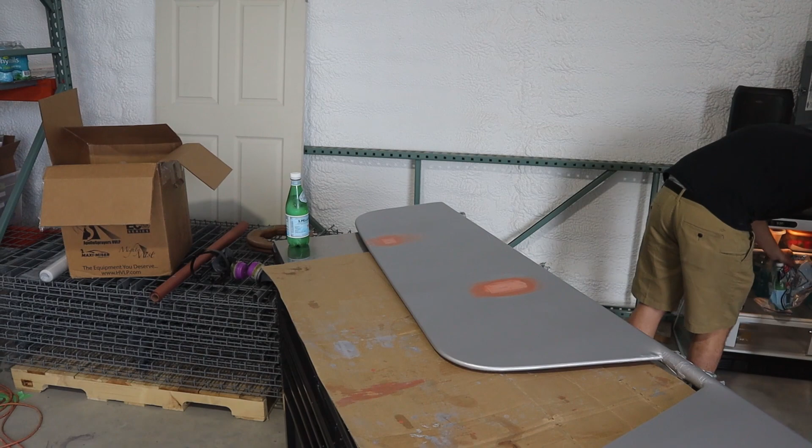So, the tail surfaces are probably the hardest things to cover, hands down. In the manual, it says to start with the wing first, which is the most intimidating thing to do. And I would agree, it is intimidating, but it is the easiest thing to cover, hands down. I'm on the fuselage right now, so I can confidently say that the wings are the easiest to cover. These are definitely the hardest.

One of the reasons why they're so hard is because they have all these curves on the back. It's not difficult, it's just a lot of work to get the fabric to work around a curve. It'll work if you're good with an iron, but there's definitely some technique involved, which I'm going to show eventually when I get to the fuselage. But it took me a while to understand it.

This piece I actually covered with two pieces. There's two ways you can do this. You can wrap one single piece of fabric all the way back, so you have the end of the fabric wrapping here, and then another fabric going on top of it. So it would be a single piece sort of clamshelling the whole end. That I tried to do on the rudder, and it ended up being a real pain.

So what I decided to do instead was the other method, which is wrapping it in two pieces. This is how you wrap the wing, so it made sense to me to just do the tail surfaces this way. Let's stop looking at these patches, they're ugly. So this one is in two pieces, just like the other horizontal stabilizer. But what you end up doing is do the bottom first.

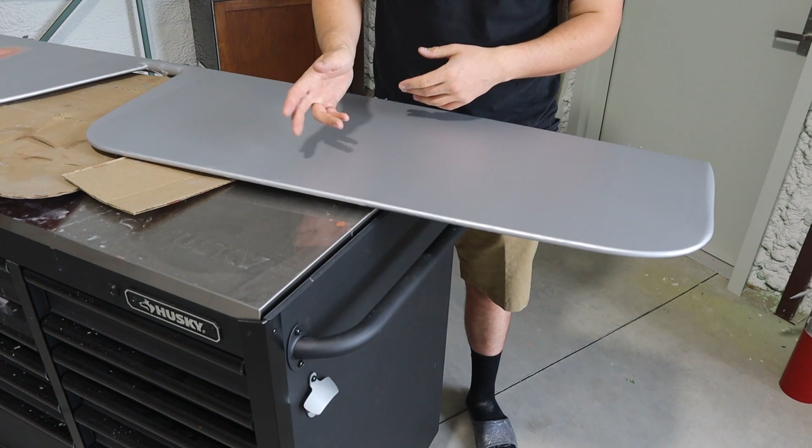But definitely a challenging process. I wish I could explain a good way of doing it to you, but it's really just something you have to experiment with. I'm going to show you how I do it with the vertical stabilizer, and that'll help give a good idea of how to cover it. But definitely the hardest part, definite learning curve.

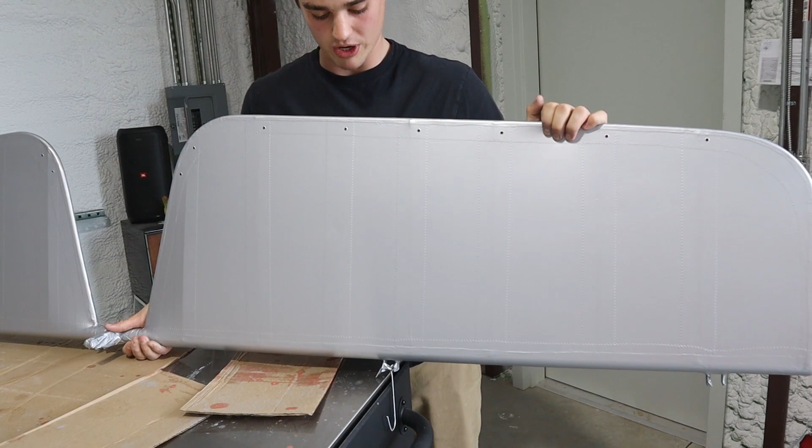Some other thoughts about this. Does this one have inspection on the bottom? No, it doesn't. I got drain holes, which were on that wing over there. There's a couple ways of doing these. There's special grommets, not included in the kit, and I'm not buying them because I don't need them. Every wooden rib basically delineates a bay, and every bay needs a drain hole. I just used a little washer and my burn tool. You put the washer on and melt the middle out, and it makes you a drain hole.

And Polyfiber says that you don't need a grommet on there as long as there are 2 layers of fabric. In fact, this is 3 layers of fabric. There are 2 finish tapes and then the bare fabric. That does not need reinforcement or anything. It's just fine just how it is. Seems kind of strange and a little bit odd, but it's the bottom of the wing. Who's going to see it? Doesn't even matter. So those are the drain holes.

Finish tapes, they go on every wooden strip. You could use the 1-inch tapes, but I didn't have them at the time, and I didn't think it was necessary, so I just put 2-inch tapes on everything. It really doesn't make a big difference.

One other dilemma that I ran into, again, I don't really know what I'm doing here, so I figure out these things along the way. When I was sanding the Poly-Spray, the silver coat, I ended up sanding a hole all the way through the fabric. And that's because there was a tiny little, is that another one? No. There was a tiny little bump on the rib underneath. So I was like, what is this?

I thought it was a pinhole, so I just kept trying to sand it out. And I realized I've sanded a hole all the way through the fabric. And I went through this moral dilemma of trying to say, oh, it's fine, I'll just leave a hole in there. But I couldn't really live with myself unless I put a patch on. So I just put this finish tape patch on it.

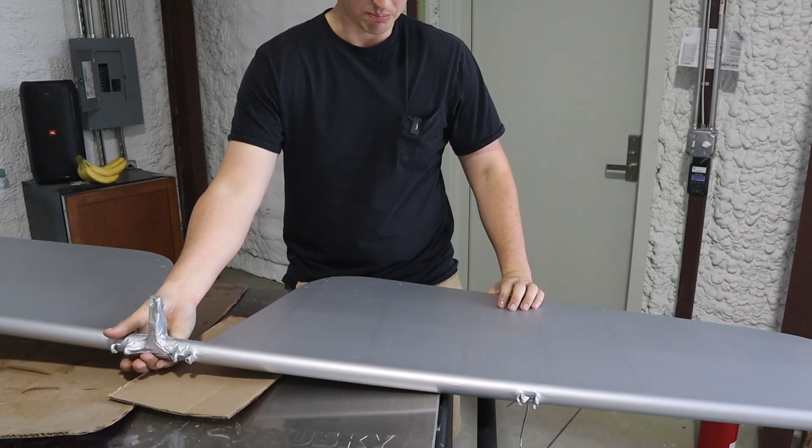I spent a lot of time trying to get all these tiny little imperfections out with the iron. But at the end of the day, a lot of them won't even show through. But let's just look at some of the ones that do show through, so it maybe helps inform what you have to work out with the iron. So this is the bottom. Obviously the bottom is not going to be perfect because it's the bottom of the elevator. Who the heck's going to see it? Nobody. So I don't really care. It's going to get beaten up by rocks and stuff anyway.

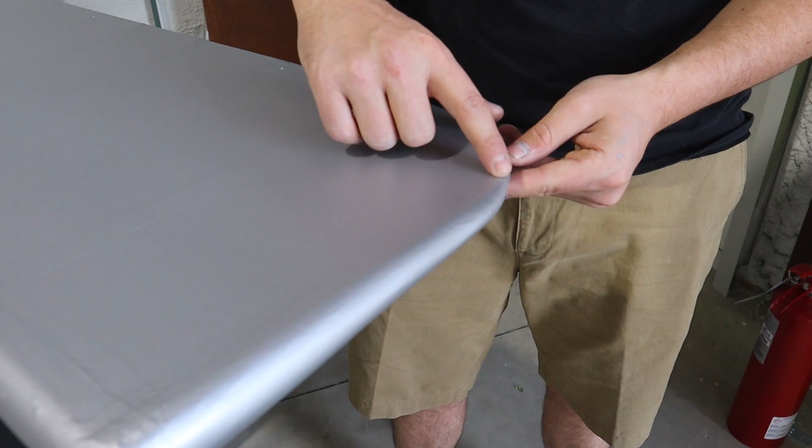But it's a good example of what shows through the fabric, because I didn't put as much effort into getting the imperfections out of the covering process. So over on the end here, I don't know if you can see this, but this was where the fabric was pulled over and had to be ironed down. And that was a little wrinkle at the corner of the seam. There's one right there, there's one right there, there's one right there.

Those are just tiny little wrinkles that show through on the paint, and they show up as a tiny little bump. Mind you, even on this poly spray, I can still go through and get those out with an iron, but at a certain point it's diminishing returns.

If somebody's really that vain that they're going to comment about my wrinkles on the bottom of my elevator, then we're not going to be friends. So it's not really a big deal.

So there's an example of something. This right here was where poly brush was tacked on a little bit too thick, and then I hit it with an iron. You can actually see the shape of my hobby iron right there. So that actually is showing through the paint. There's another example of it there. These little imperfections here were poly brush runs.

There's poly tack runs somewhere on here. Like that was excess poly tack. This whole seam back here was a little bit of excess poly tack. I could have cleaned it off with MEK or ironed it out, but all of it eventually shows through, and it just makes more finish work for you later on.

So if you're trying to chase things out with the iron, a good rule of thumb is if you can feel it with your finger, it probably will show through. It is way easier to get it with the iron than it is to sand it later on. And at the end of the day, if it's on the bottom of the elevator, I don't care. So I'm not going to chase these out.

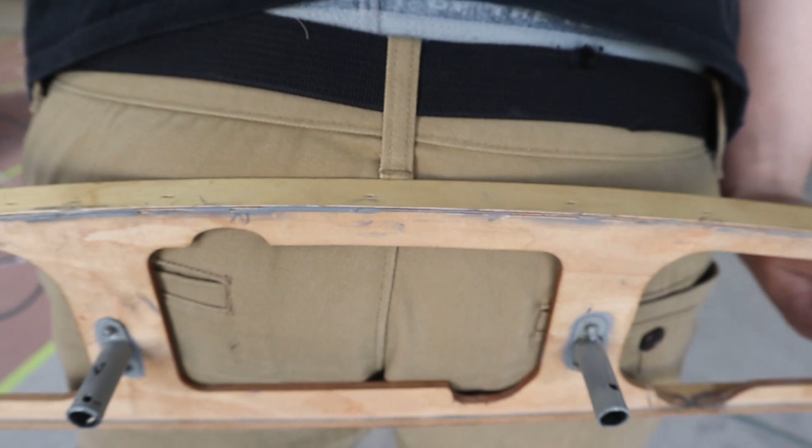Okay, we're going to talk about the butt rib dilemma. So, as you may know, this is a butt rib. It's not called a butt rib because it has anything to do with butts, but it does butt up against the wing, so that's why they call it the butt rib. I just think it's the silliest piece on the plane, and we always joke about it.

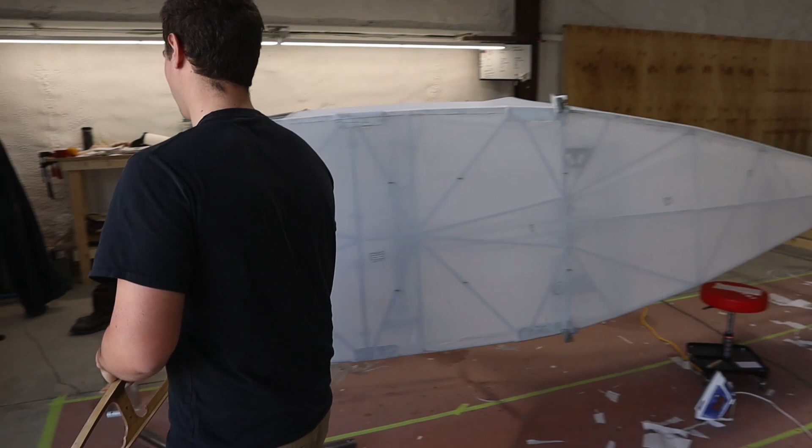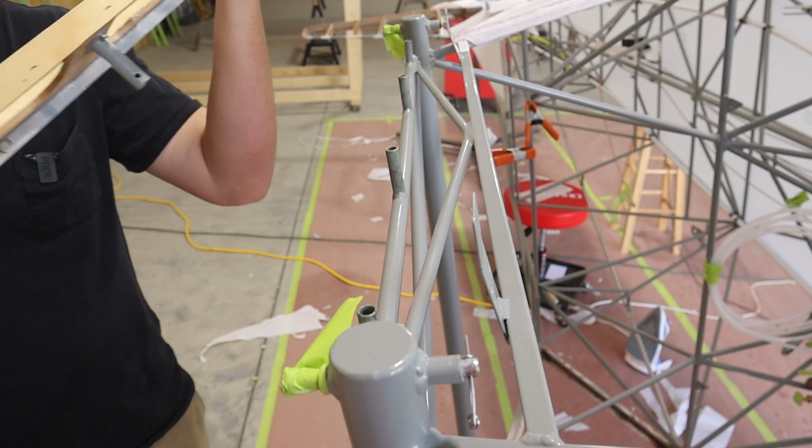Nonetheless, I did this wrong. We're going to go over to the fuselage so we can see what this looks like. This is how the butt rib attaches to the fuselage. So there's basically 4 of these little metal pieces that slide onto this slot and lock this thing in place. And this one's a real pain. I'm not even going to put it back. Yeah, oh wow, that worked well.

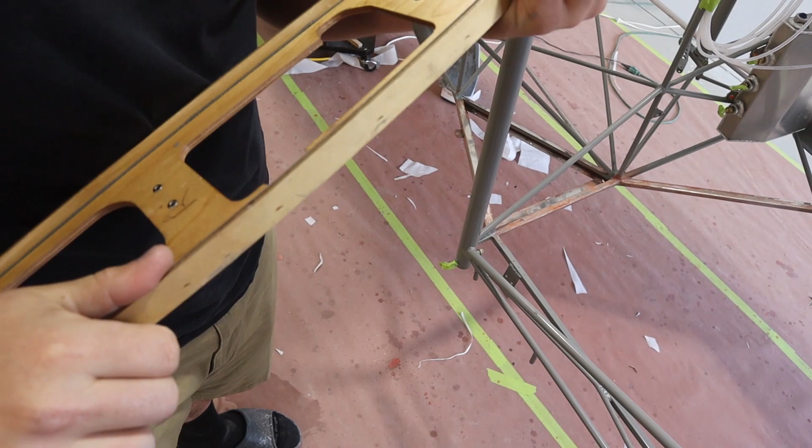What it does tell you that you have to do is take this little aluminum strip, which is a tiny little piece of floppy aluminum, and glue it up against the bottom of the cap strip here. I was just stupid, and I should have just inferred that the way I did it was wrong. There's a long side and a short side. You see, one side here is longer than the other. This one barely even protrudes, and this one sticks out pretty far.

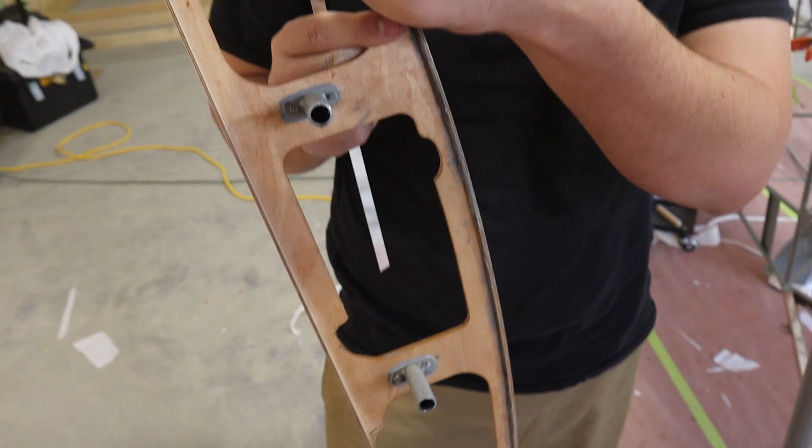This piece is cut just long enough so that it almost perfectly lines up with this long side. And I should have just seen, oh, wow, that matches perfectly. That's maybe where it should go. Nope, wrong. I just put it on the wrong side and glued it in place. So what I've done basically is ripped that other piece of aluminum out, and now I have a bunch of Hysol in here that I'm going to have to sand out with a sander, and I'm going to have to glue it to the other side.

What this does is add a reinforcement for attaching the windshield. So let's just look at the one that's on the fuselage. If this was done properly, this piece, I'll put this other butt rib down, this piece would be glued in there, and when the windshield sits on top here, they actually call it a moon roof. The top of the windshield, or the moon roof part, sits up atop this butt rib, and it actually mounts through this cap strip here. And this aluminum piece is a reinforcement plate for the back of the cap strip.

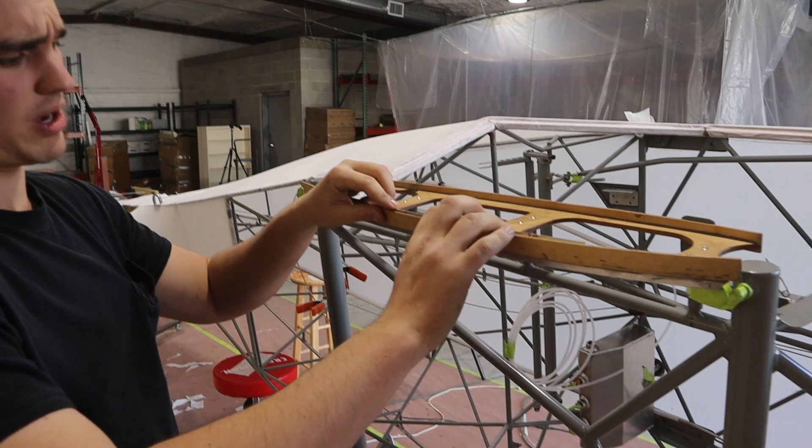You see what I did wrong is I put it on the short end, and there's no way I'm going to mount the windshield to this tiny little strip. And now I'm going to have to undo both of these. I'm not going to redo my butt ribs entirely because there's no need to. There's a lot of work, a lot of sanding and stuff. But I am going to rip this piece out and put the same piece on the other side, and we'll call it a day. I'll have to end up cleaning all that Hysol out. It'll actually be a lot of work, but a lot less work than trying to redo the whole thing.

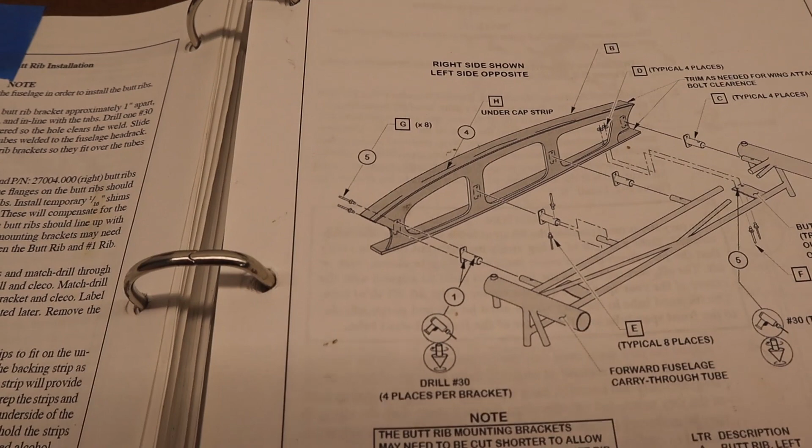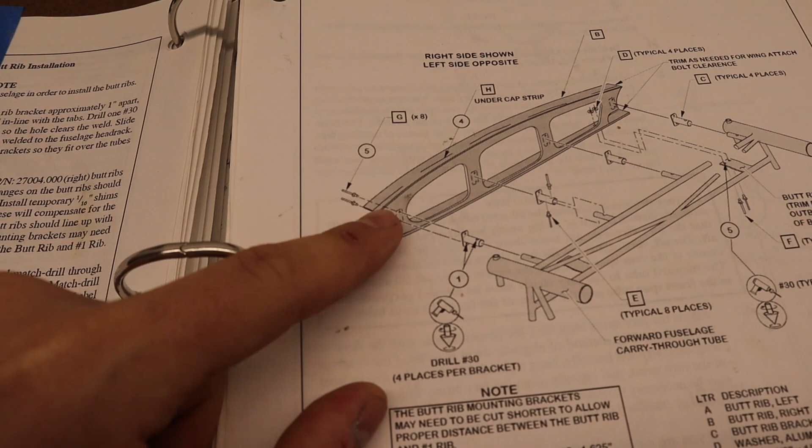So one of the things that Project Kitfox talks about is how, again, the manual doesn't really say which side to go in and out. I actually can't remember if it does, but I remember this being a problem piece. It was very hard to understand. But you see that the long side and the short side basically have a direction where they're supposed to go. We inferred, when I was doing this a while ago, that the long side was supposed to go on the outside, which is actually technically the correct way to do it.

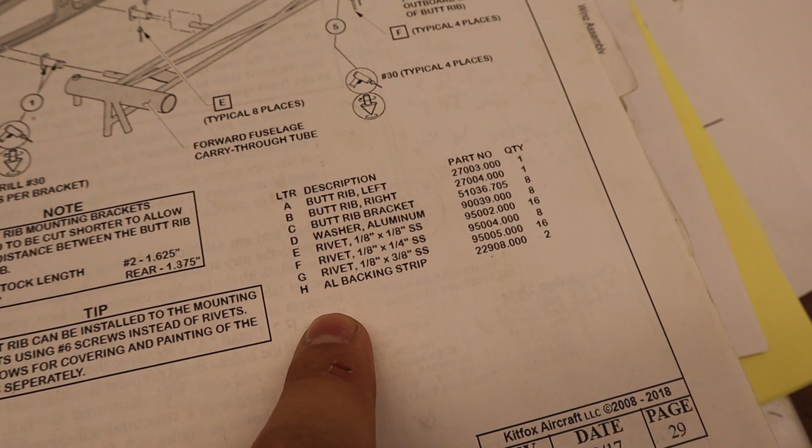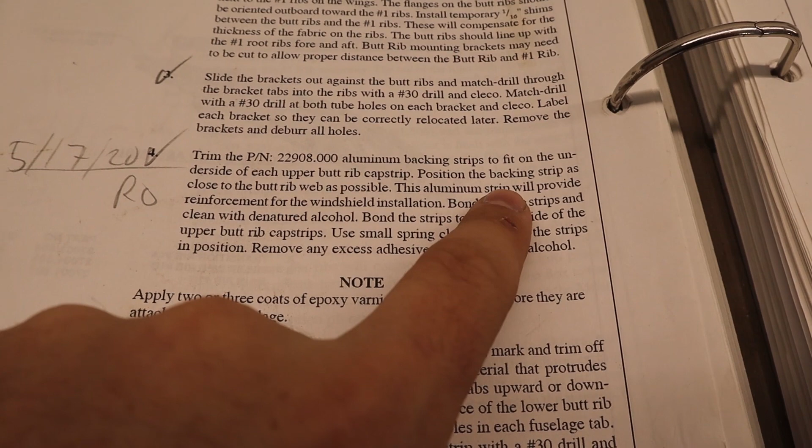But it would be easier if you switch these and effectively the long side was on the inside. So if I had switched these around from the beginning, the long side's on the inside, and that gives you, well, I haven't gotten there yet, but watch Brian's video.

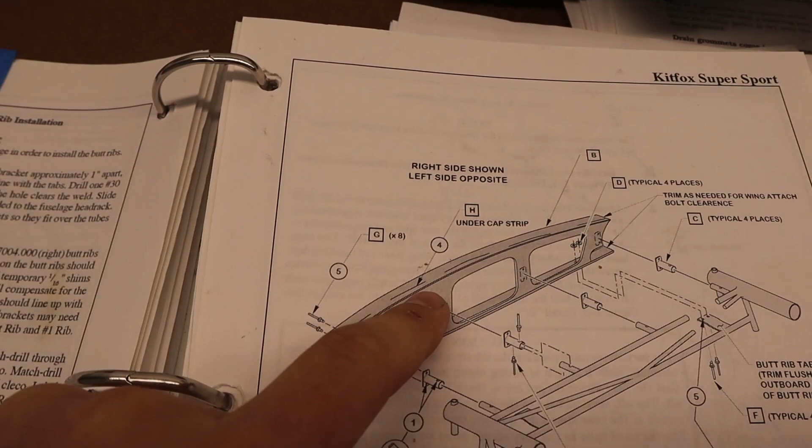He talks about how that helps you screw the windshield in later on without having to be really close to the edge of the windshield. So I did that, not wrong, but I wish I did that differently. But these are already mounted. I'm not going to redo it. I'm just going to redo this thing and call it good.

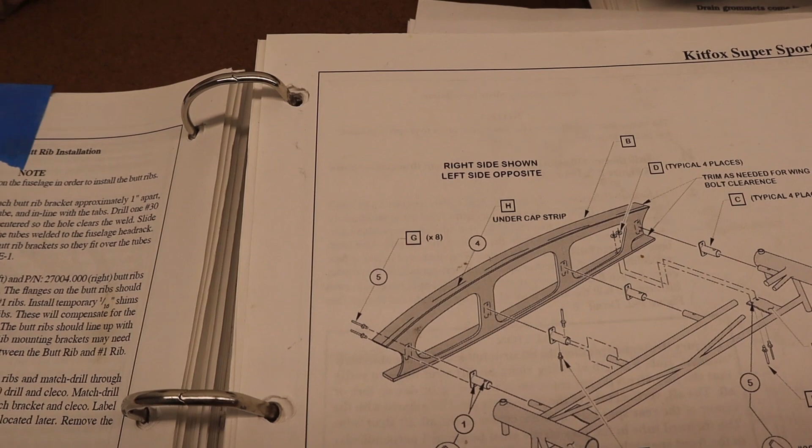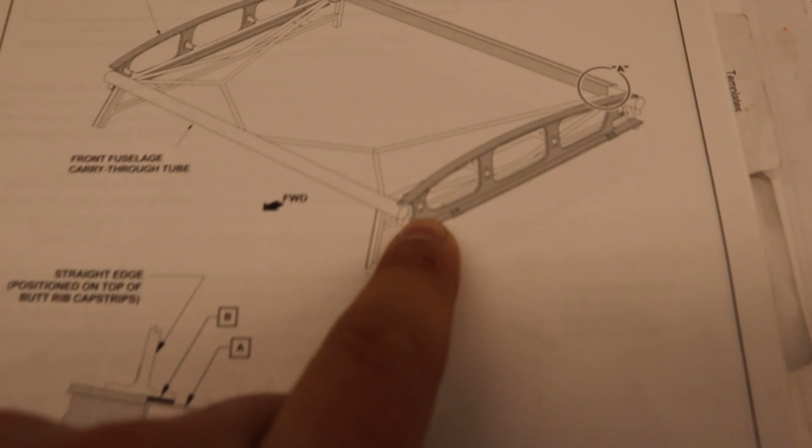So there's the butt ribs. Here's the instructions for the butt rib mounting. So it's kind of vague. It does show that there's a differential length. It shows the long side on the outside and the short side on the inside. It would give you somewhat of an advantage to flip that around and have the long side on the inside and the short side on the outside. But the instructions do show the long side on the outside.

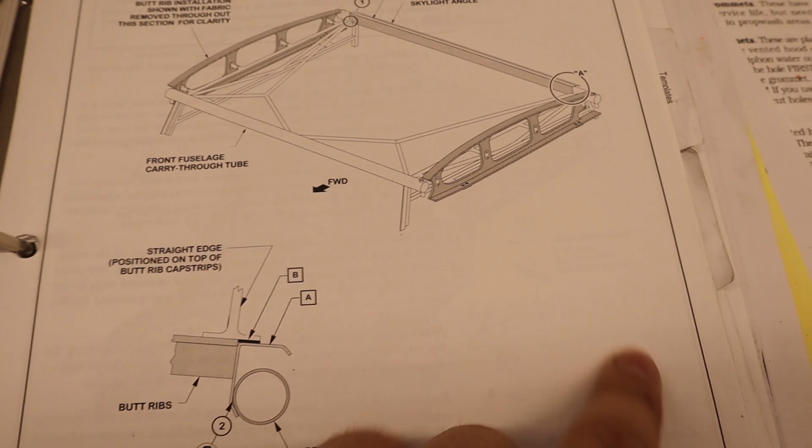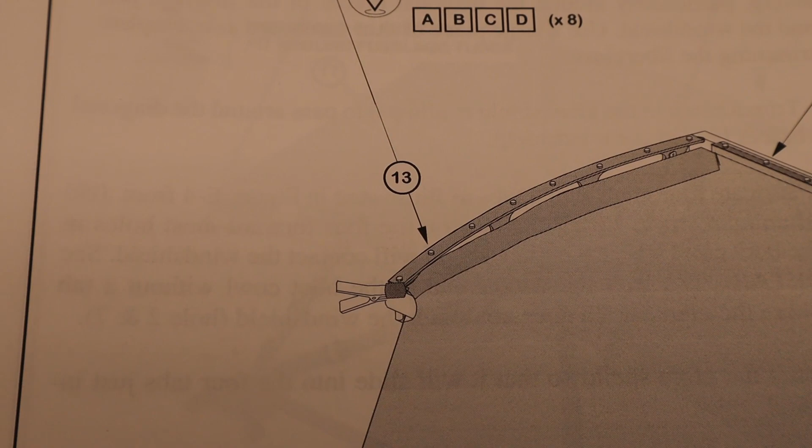And they say part H under cap strip, and it just points to the middle. To me, that looks like it's pointing to the short side. Part H is the AL backing strip. And it says, trim the aluminum backing strips to fit underneath each upper butt rib cap strip. And it says just position it as close to the butt rib web as possible. And it just tells you what it's for. But it doesn't tell you which side to put it on.

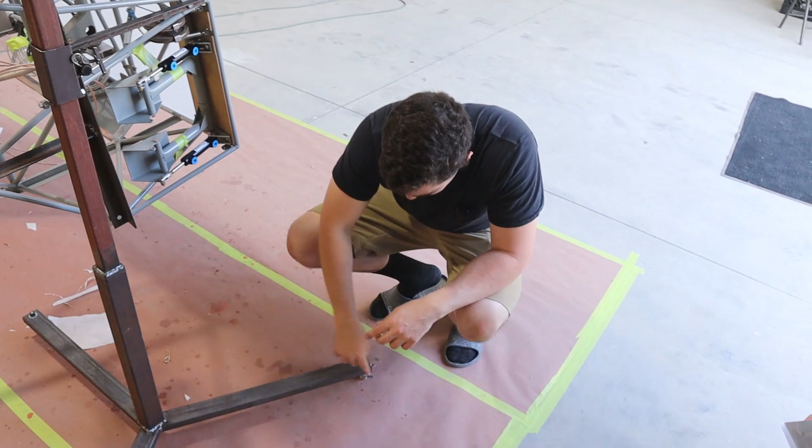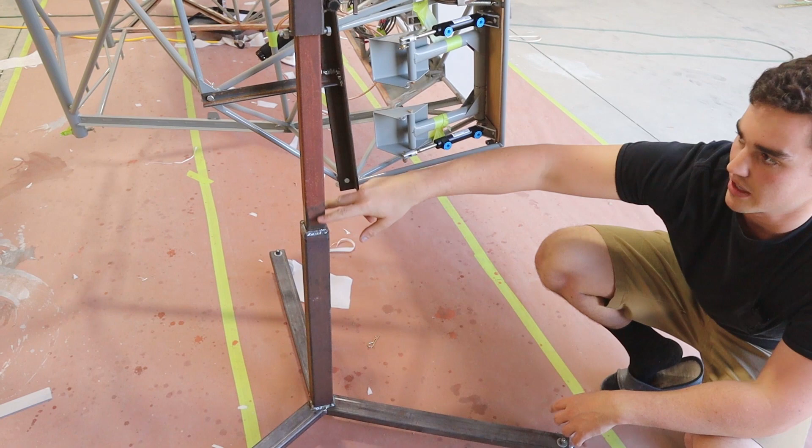And I should have just inferred that it goes on the outside, but there's no image of it there. There's no way of really knowing what it's supposed to look like. So it's just sort of a vague part of the manual. And you would assume, maybe, if we go to final installation, it doesn't really show the aluminum strip in there. So there's no way of knowing, is it supposed to be on the inside or on the outside?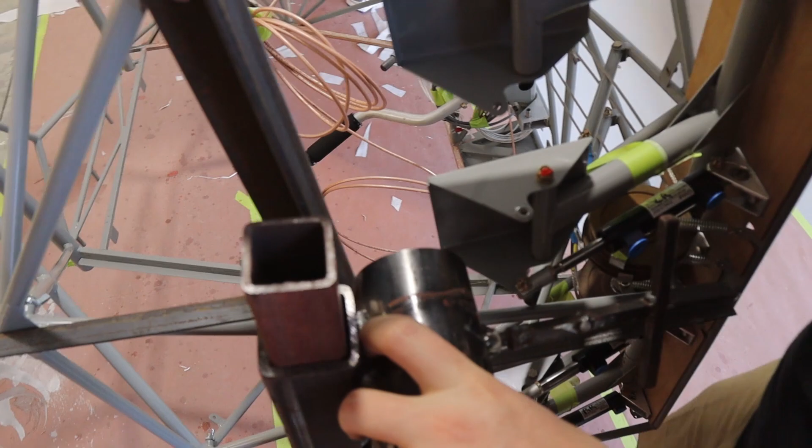These are fuselage rotisseries, but it actually was just a wing stand that I ended up repurposing, and I can use for both. We built these whole things out of scrap.

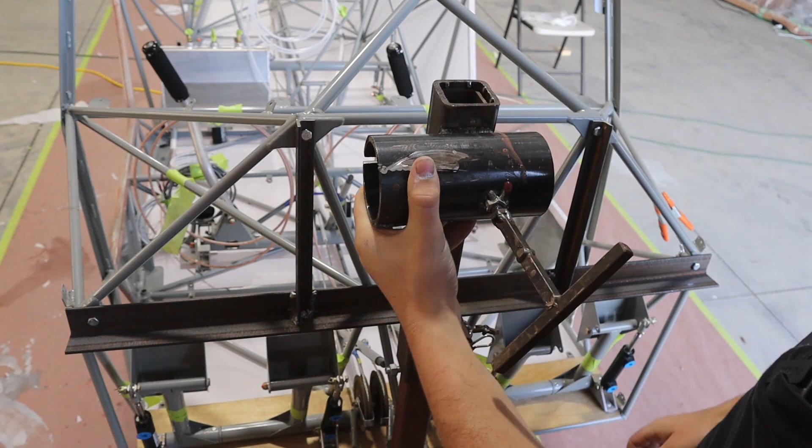I got my safety sandals on, you like these? Steel toe safety sandals.

I've got 1 inch by 2 inch square tubing. This is a 2 inch square tubing. This is a 1.5 inch square tubing. I didn't have a lot of 1.5 inch, so I ended up taking scrap of both of these and welding them together so that they make a nice attachment point.

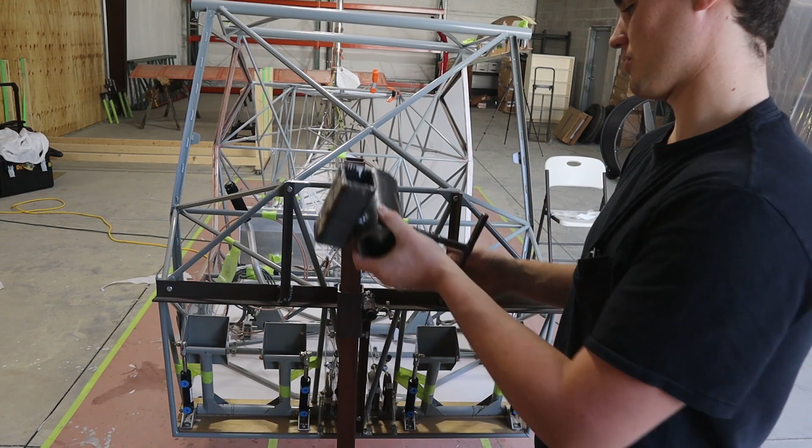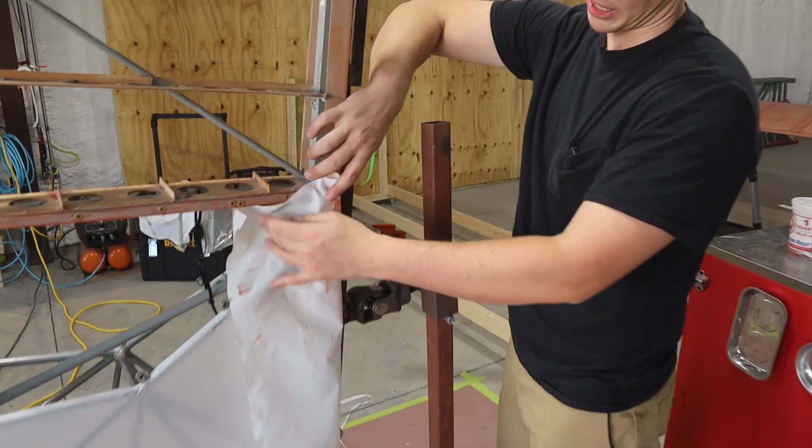But let's see, there's basically an axle piece that goes in this tiny little piece of steel tubing. And I thought I could lock this in place with this tiny screw. There's way too much leverage on this thing. There's no way to hold it in place. So my workaround is to take the wing racks and use that as a stop on the angle iron that I put there, and that helps me rotate and lock this whole thing in place. So we're going to tip this thing over.

Let's just go back there. So the front of this, let's take that off. The front of this is pretty straightforward. I used all the existing engine mounts with wing nuts on the back and just welded pieces of angle iron to hold the front end of it. And that goes to this little axle point.

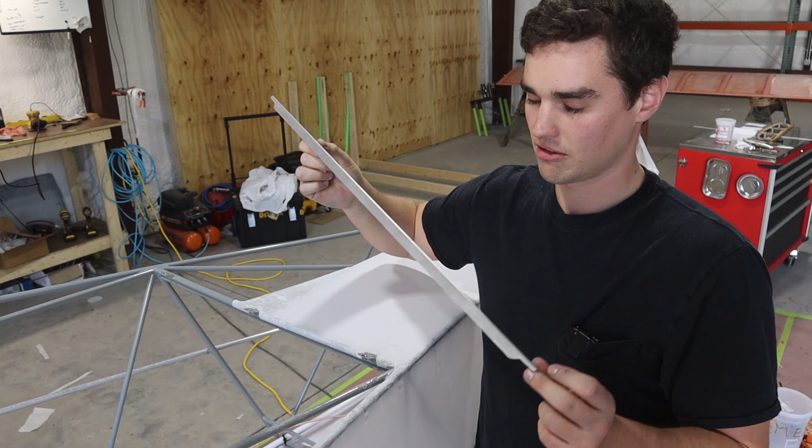If I had to do this again, I would have used the bigger, I guess this is 2 inch tubing, to go inside one of these tubes. And that would have allowed me to lock it in place with one of these nuts, because it would give me more leverage instead of just this dinky piece here. But it works. I have no complaint. The back end, which we can go look at,

I stole this directly from the Kitfox factory. It's just a tractor U-joint that I got from, not Tractor Supply, from Rural King, that allows you to effectively turn, and it no longer needs to maintain the angle. If you were to put the straight pipe through there, then it would basically put torque on your pipe every time, but this way it allows you to really get weird about the angles.

So these are great. I put casters on there so we can roll it around. And when I want to do wings in this rotisserie, I can just pop these little metal pieces off and throw the wing racks on, and this becomes a multi-purpose tool. I didn't want to make them look super pretty because when I'm done, I don't really need them for anything anymore. So I guess they're just scrap garbage. So they're not super awesome, but they work.

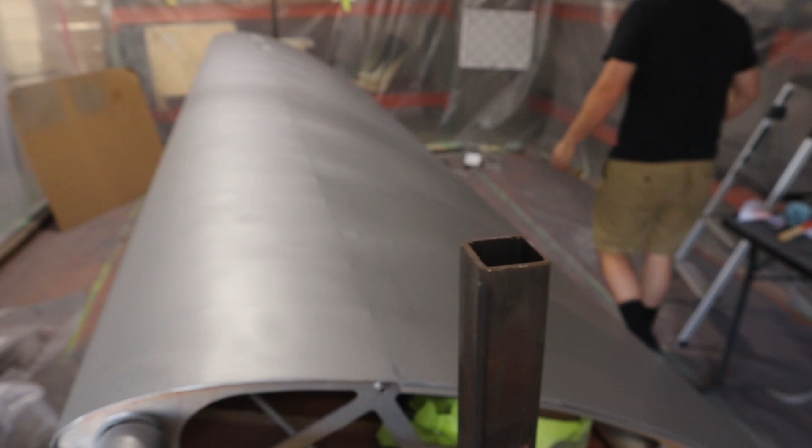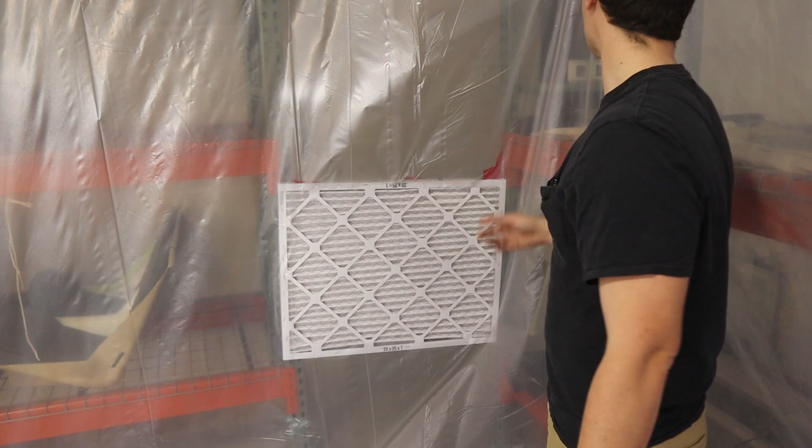The way I attached it to the top was with zip ties and staples. You can see the black zip ties up there. That was originally how I started doing it. If you're saying I'm being wasteful with zip ties, I have like 4,000 zip ties. So I can do this probably another 100 times before I'm gonna run out of zip ties. So I used all those zip ties, and then the rest of them I just used a staple gun to get the top fabric in place.

There is a middle support piece that goes down the middle that I also use to hang, like, the tail surfaces to paint. And that also keeps the plastic on the top from drooping, but it's pretty good. Hello? Oh, look at that.

Okay, so I have my pony clamps that I use to seal it off. I just clip the pony clamps onto the plastic. I'll do one on each side. It's not perfectly airtight, and quite frankly, it doesn't have to be. It does keep down dust on the inside, but the big thing that you're about to see is that it keeps the dust in there when you're painting, or the overspray. So this has got a nifty little pulley system.

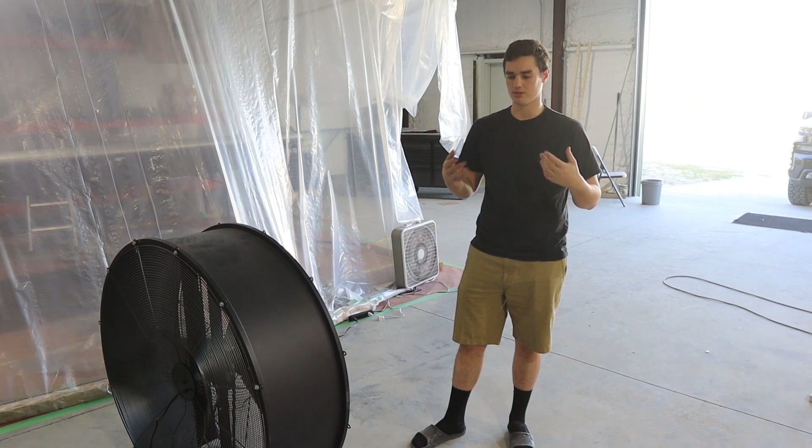All right, there's that. So in here are my old wing stands. This is just a cheapo box fan that is literally stapled to the plastic. I cut a hole and stapled it. And you see it's really nasty. That's all dry paint products, it's overspray that ends up getting caught on the fan on its way out. So that's enough actually to ventilate this whole facility. I'm not trying to get fresh air because I use my organic respirators, but it does keep the dust down.

I probably didn't even need to do this, but I just stapled an AC filter to the back, and this is my intake. Although this thing leaks like a sieve, so who knows? We're probably getting air from every corner of this thing, but at least it is an attempt. When the fan turns on, this does want to suck in. So I ended up just zip tying the sides over. And then I had to weight the bottom down because it wants to suck the whole thing together. So I put wood and metal to keep it from closing in on me, as well as a piece of rope there.

Then here, we've got my place to hang the tail surfaces when I'm painting them. I basically hang them on two points, which is kind of hard to work with, but it ends up working out fine. And yeah, this is the paint booth. The big thing about the paint booth is, you see how dusty this is? That's overspray. It's not just dirty in here. So when you're painting the silver on, it gets all dusty, and all that dust settles out to the floor. If I didn't have the paint booth, this whole shop would be dusty. But instead, it's all contained to this space, just long enough for it to blow out.